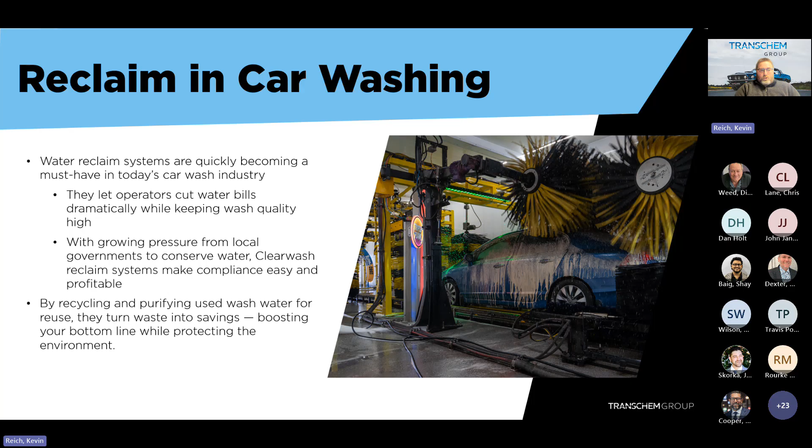So what a reclaim system actually does from a technology standpoint: reclaim systems use energy, chemistry, biology, and/or time to remove suspended solids from the water. These are terms like filtration, separation, coagulation, and biological treatment. Reducing suspended solids in that water allows for safer use in our pumping equipment throughout the wash process. Any of our high pressure pumps typically have a minimum water filtration requirement of about 10 microns, so anything larger than 10 microns in the water can actually cause damage to the pump. With a water reclamation system, we're removing that material from the water to make it clean enough to use in the wash process.

Other functions of that reclaim equipment are to reduce the foul odors associated with wastewater being stored underground in tanks. There's bacterial growth; that's going to happen in every tank situation. We add oxidizing chemicals or ozone, which we'll get into in more detail, to reduce those odors and also to help treat some of the chemistry and other things in that water as well.

One key with reclaim is it's not a magic bullet. As we kicked off this slide, we need energy, chemistry, biology, and time. Those are the building blocks of what we need in order to recycle water, and all of those have a cost associated with them. We're not generating water for free, and the cleaner we intend to get the water, the more it generally costs to filter it. At the same time, we're always looking to balance that cost against our water and sewer charges to the municipalities, and reduce our freshwater usage and our environmental footprint in the most efficient and effective way possible.

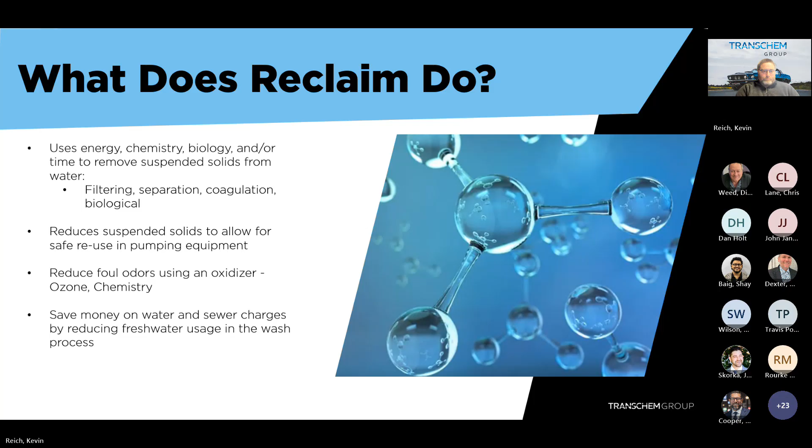So how can Clearwash help? At Transchem, with Clearwash, we build affordable, effective, and simple water reclaim options to support your car wash operation. These are designed and built by people who have operated car washes in the past. We know and understand some of the troubles operators have had with water treatment equipment, and have always worked to address those concerns to make our equipment low maintenance, simple to install, and durable. We use stainless steel in all of our framing work. We've got units out in the field that have washed

300,000+ cars successfully. From an ROI standpoint, on a typical IBA rollover touchless system, a site with about 20,000 cars of annual car count, with our water rates here in Cambridge, we estimate we can save water and sewer costs of up to around $20,000. With a typical reclaim system we can build an ROI of about 3 years on a single bay automatic. With a life expectancy of the equipment upwards of 10 years, that can be a significant savings over the life of the machine.

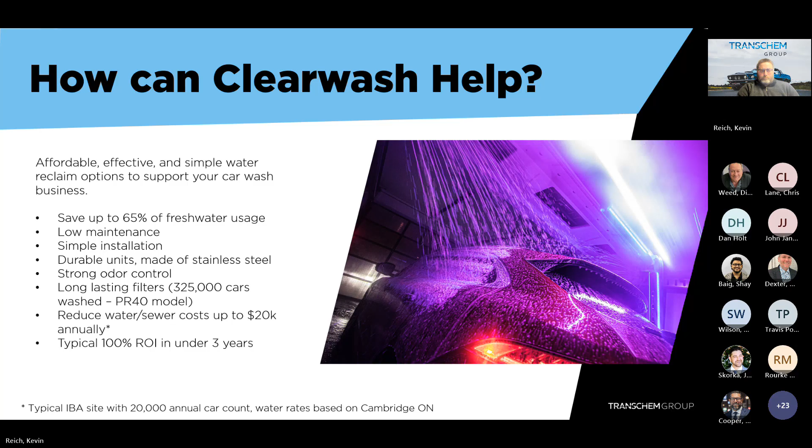All of our reclaim systems are manufactured right here in Cambridge by the Transchem Group. We offer a complete product line with 2 base systems: one is a 40-gallon a minute, the other is 90-gallon a minute. The 40-gallon a minute unit is applicable to the rollover automatic market, either a single touchless or possibly a dual cloth automatic application. Our 90-gallon a minute units are meant for multiple in-bay automatics or a tunnel application where we're using much more water in the wash process.

From a technology standpoint, the systems use glass media filtering to clean that water down to 10 microns, and then we use ozone injection. We use a high-powered corona lamp ozone generator to send ozone back down into the wastewater tanks underground to fight off odor and bacteria growth. Also, ozone as an oxidizer can remove color, scent, and other contaminants in that water to make it as close as possible to clear water, so we can use it in as much of the wash process as possible.

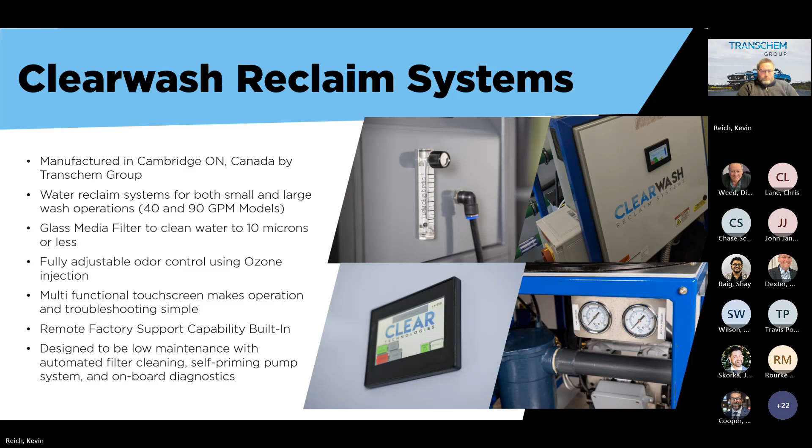So these are the 2 systems that we offer. Size maybe not quite to scale here. The PR40 unit is a 40-gallon per minute unit, as mentioned. This unit is a little bit more customizable. We can do odor control either via ozone or, in a new version of the system, we actually have the ability to inject an oxidizer chemical, actually a couple of oxidizer chemicals, into the process to control odor instead of ozone, designed specifically for the single IBA market.

And then the 90 gallon per minute unit is our larger tunnel application setup. Again, 90 gallons per minute, strictly an ozone system, useful in either the multi-IBA or the tunnel market.

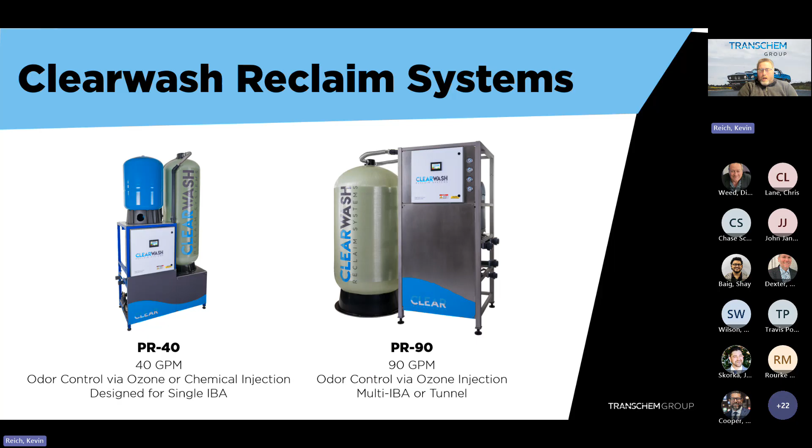So the system operates simply by pushing water through a multimedia glass media filter. Inside that filter, we're essentially pulling out all of the contaminants, all of the suspended solids in the water. The filtering capacity is significant enough that we can filter a significant amount of material out of the water in a single pass.

The key here is that it's on demand, in that we only run the filter system when necessary to supply our wash equipment. We can supply up to 40 gallons a minute, but we don't require that flow in order to achieve our filtering capability, which is a key difference from, if anybody's familiar with, a cyclonic reclaim system. Cyclonic reclaim systems require a minimum flow rate to actually perform their filtering to a successful level. With our system, we can essentially filter down to less than 5 gallons a minute of water at a time. So we're completely on demand.

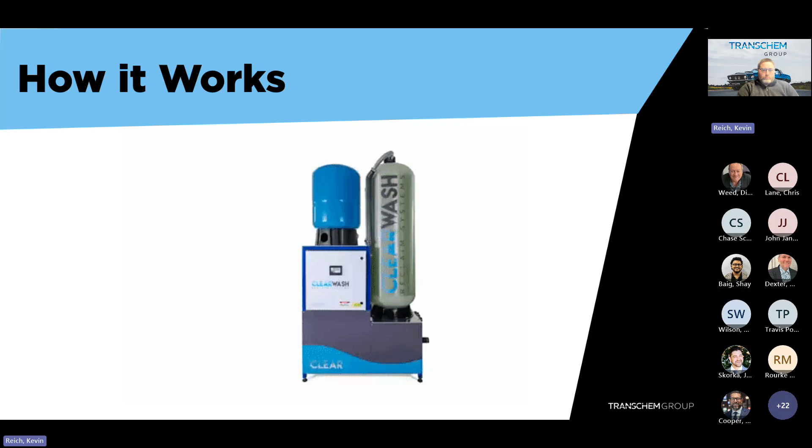So we can get into actually how the cycle of the machine operates. We'll discuss this at a very high level. I won't get too technical into this, but essentially down here in all of these pictures, we have our 3-compartment settling tank. We have our filter media tank here on the system. And then up here in the left-hand corner is our ozone generating system for odor control.

So when the wash is in its typical operating mode, where we're actually filtering water and supplying to the car wash, the pump in the tank down here activates. We push water through the process, through our glass media filter, and right out to the car wash system. If the water in the tank is properly treated with ozone when we're idle, which is what we'll get into in the next step, then the odor control happens throughout the entire process. As long as we keep water moving, filtering and sending it to the wash, odor has already been controlled by keeping everything moving and keeping the odor down using ozone in between cycles.

So in the second operating mode, when the wash isn't operating, we're still drawing water out of our tank. We still run through the filter cycle, which is quite important here. So we're still filtering and removing the suspended solids from the water. But instead of sending it through the car wash, we're actually forcing that water back through our injection cycle and back into our underground storage tank.

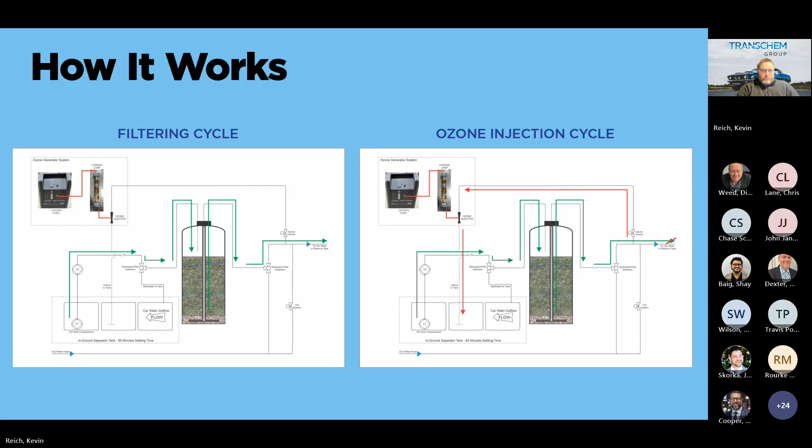This water then will cycle through that tank over and over and over again. And as it's doing that, it's spreading ozone throughout the whole process. That ozone is what attacks the bacteria, which causes the odor in the tanks. A couple of other cycles that we have here, just some keys to the operation of our system.

Once the system has detected that it's run for a certain period of time, or if we detect that our filter media has become clogged with particles from the water, we do have pressure sensors that tell us when it is time to perform a backwash, along with a built-in hour meter. We will then use fresh city water to run backwards through the filter media, and then that fresh city water is recaptured back into the reclaim system to be reused in the wash process.

So it's not entirely going down the drain, it's being used back in the wash system, but that will refresh our glass media to make it essentially brand new again, so that we can continue with our filtering performance. That is something that can happen as often as daily, every night. In a lot of sites, it actually happens every 2 to 3 days.

And then the last key here is that our system has an automatic failover point built into it. So we have the ability to run entirely on city water should the system decide diagnostically that it's unable to run and build pressure to supply the car wash. It's fully automatic, it's built into the system. It's not something that we have to add externally or add controls for.

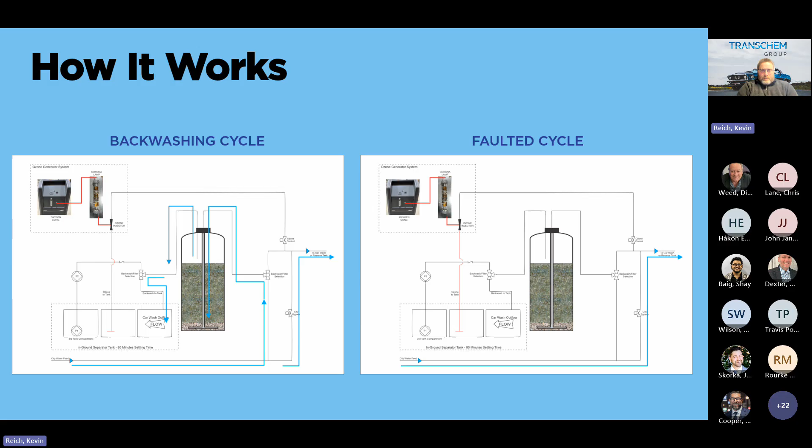So the idea here is, if for whatever reason the reclaim system decides it can't run, that could be something as simple as there's no water left in the tank, so there's nothing there to recycle, or if it detects a pressure fault or some other reason why we can't run the system, then we'll fall over to city pressure mode, where we're directly feeding city water out to the car wash. Again, to stress, that is a fully automated process.

Any questions on the equipment itself to this point? Kevin, just to highlight, that's such an important feature as a backup to have that kind of bypass ability. So thank you for highlighting that. That's an excellent, excellent point.

Okay. Jonathan in the chat here has a question. Sorry if I'm jumping ahead, but can you explain the key differences between using ozone versus biological additives for odor control, such as how each method works, their maintenance requirements, and the situation where one is more effective than the other? Absolutely.

So the key difference is ozone is something that we generate from the air. It's essentially concentrated oxygen that is highly reactive, that binds to the bacteria and kills the bacteria in the water. Biological additives are anaerobic bacteria that feed off of the smells that are in the water. They eat the particles in the water that create the hydrogen sulfide that creates the smell.

One key advantage to ozone is that other than the cost of electricity to generate it, it is free. So we are pulling the oxygen out of the ambient air of the equipment room. We are concentrating it. We turn it into ozone, and we are sending that ozone into the system. So there's no additional cost from a material standpoint. We don't have to add the cost of the chemical or the biological treatment additive when we're using ozone.

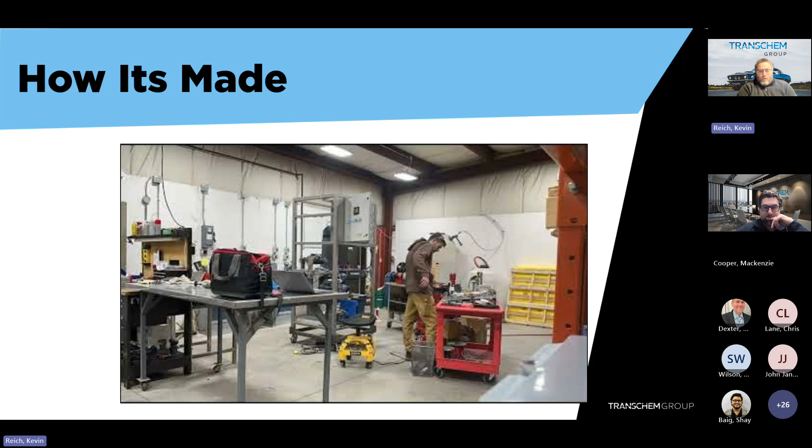So moving on, here's a very brief clip of our production facility. This is actually our wet testing facility at the back of our shop, where we're actually assembling one of our systems. So this is a PR90 system. There is mechanical assembly, there's PLC programming, there's testing and actuation testing that happens. We also have a full wet test setup there where we can fully wet test every single system that goes out the door.

And that's actually how fast we work. Just showing. Thanks, Cooper. That's maybe when we bring in a lot of coffee for the team, I would say. There you go.

So the end result, these bottled water samples are actually taken from a treatment system recently installed, where that blackish brown water has come directly from the third compartment of the clarifier. And what's in that bottle at the end is after post-processing, after our glass media filter and after the ozone. I'm sure that's after a couple of cycles in our system. But I've actually seen it here. We've got a system live at our office, and after running here for a few days, the water in our tanks was so clear that you could see to the bottom of the tank. It's actually quite impressive what we were able to filter out of that water.

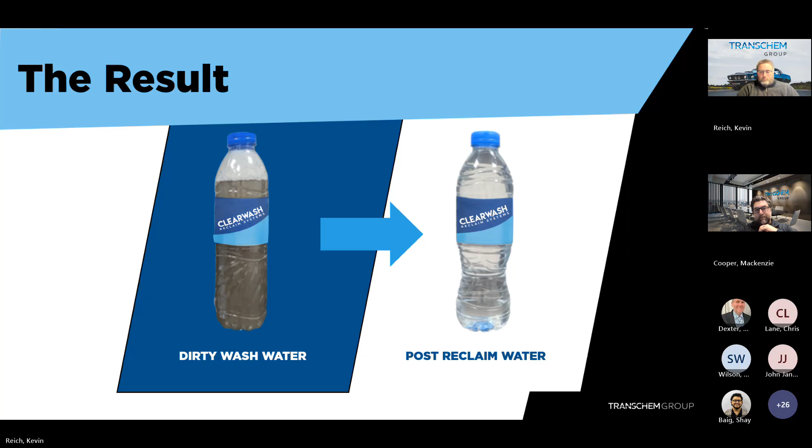So the maintenance costs of our PR40 and PR90 systems: as we mentioned earlier, one of our focuses is on low maintenance costs. The typical daily maintenance for one of our systems is simply a visual inspection, making sure there's no leaks, and cleaning out the basket on the pump on the system itself. Total time is probably about 15 minutes for both tasks, at a cost of $0 from a material standpoint. Annually, we look to inspect the ozone lamp. Typically our corona ozone lamps last 3 to 4 years at a cost of a couple hundred dollars to replace.

The media filter itself, the glass media bed: glass media is inert, so as long as the system is properly maintained and the tanks are properly maintained as well, there is a requirement to keep the tanks regularly pumped out based strictly on the quality of the water coming through the system. That media filter typically has a 3 to 5 year lifespan in a typical setup. And we typically look at replacing the entire tank and everything. That's a cost of about $2,000. It takes about half a day, but then you end up with essentially a brand new reclaim system again. Very manageable and low cost is the point. Yeah, absolutely.

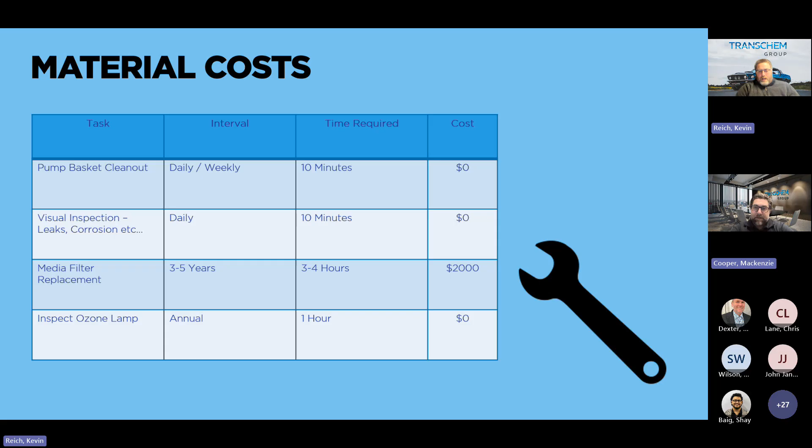From a service and support standpoint, we have a service team here in the Ontario market as well as our Alberta market where we're direct to market. We have a growing distributor base for Clearwash throughout Canada and the US, and we offer full technical training to those teams with the intention of growing that out in the market. We have one dedicated support person here in addition to myself, and we have the ability to remotely access the equipment in the field to do troubleshooting.

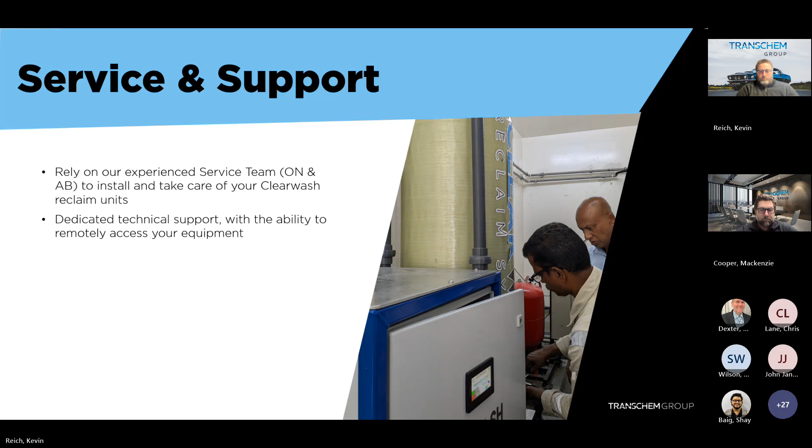The last piece that I want to talk about from a reclaim equipment standpoint is our R&D. Here at Transchem, we take R&D and product development very seriously. We invest a lot of time and energy into it every year.

Reclaim is no exception, and Reclaim has actually been a pretty big focus for us in R&D in the last 12 months. We do feel that it is a growing product line for us, and we have invested significantly in that respect. So a couple of R&D projects we've worked on over the last year and a half or so. Number one is our chemical injection system. So what we've done is, due to customer demand, we're looking to have the option to offer a non-ozone reclaim system in those situations where that's the preference the customer wants to go.

We spent a lot of time and energy developing using our same base PR40 system, but we've added a triple chemical injection system where we have the ability to add 2 different oxidizers, as well as an odor control agent that we manufacture here, to essentially achieve what we typically would achieve with ozone from an odor control standpoint. But as well with the dual oxidizers, we're actually finding very significant performance from a water clarification standpoint as well.

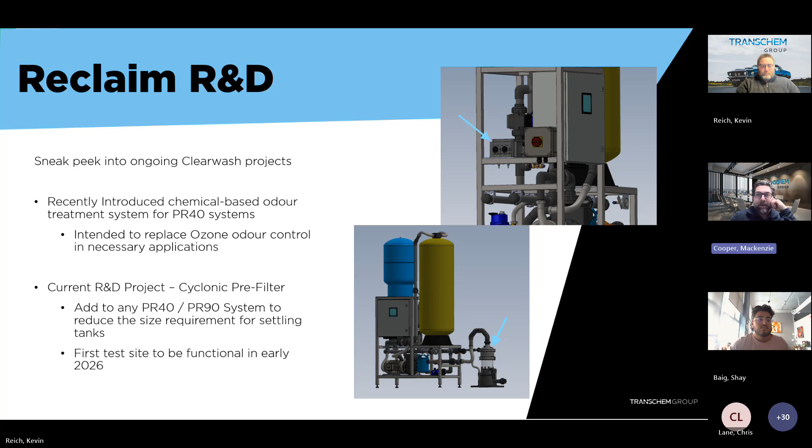And Kevin, you're highlighting a very important piece when it comes to sizing. In a net new scenario, sizing appropriately to the tanks and to water consumption up front is obviously extremely important, and setting a realistic expectation of the system itself. We are advertising that our systems have the ability to do 65% reclaim, capture and reuse, but understanding what applications to use reclaim in, and of course sizing them appropriately up front is an extremely important piece. So I appreciate the highlight of that.

And of course, when it comes to the chemistry portion, from an R&D perspective, Transchem itself, we put a significant effort into our reclaim chemistry technology, and it's an ongoing R&D process, as we know. The market and chemistry and road films and many different variables change. So Transchem as an organization is always looking to consistently add to their product breadth and reclaim technology. That's basically our commitment to our customers, always be ahead of the R&D process, and always offer our customers an excellent chemistry selection to go along with their car wash and appropriate reclaim situation.

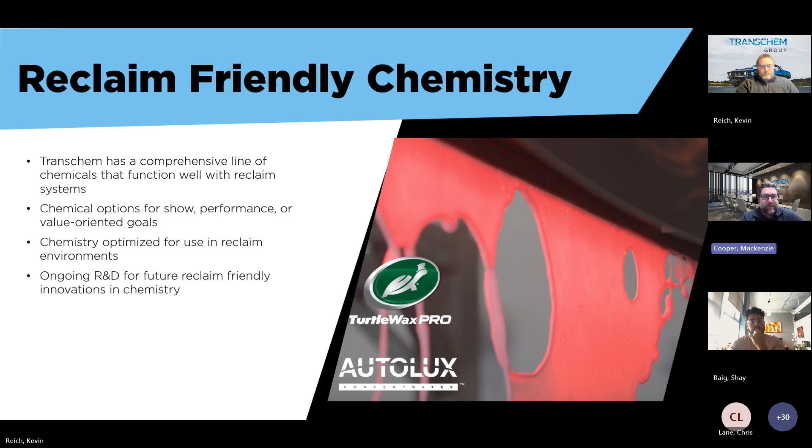So, I think if you go to the next slide, we can discuss, I believe it's the offer that pops up there. Be hitting next. I'm trying to get it to. There we go.